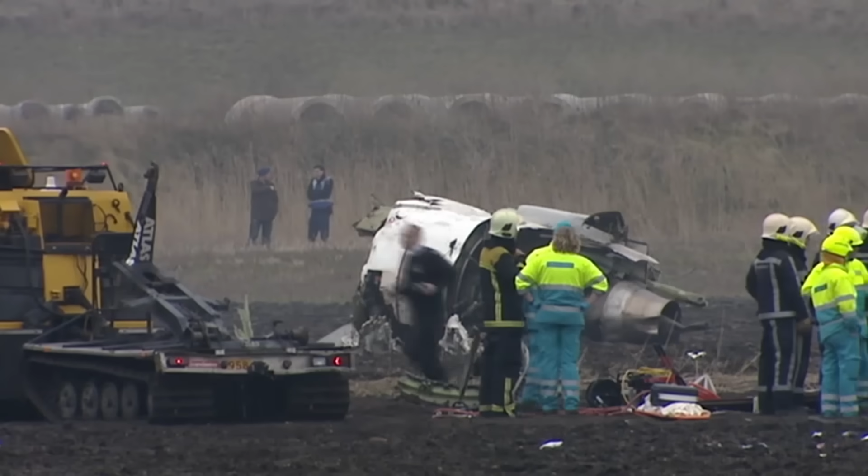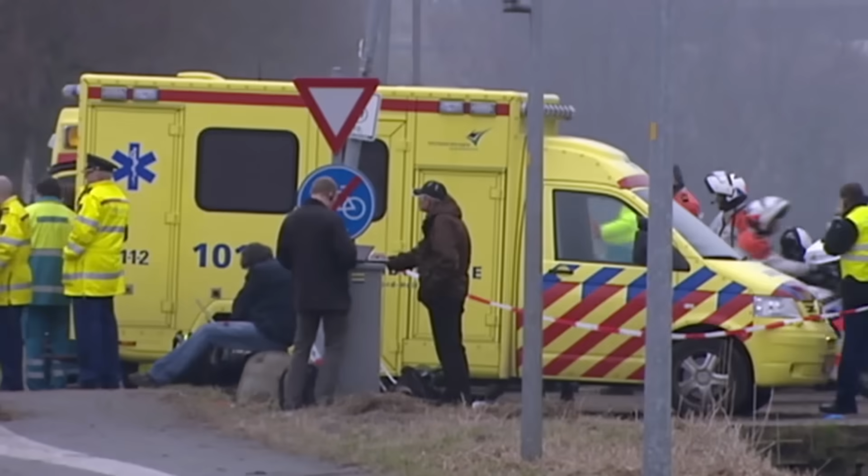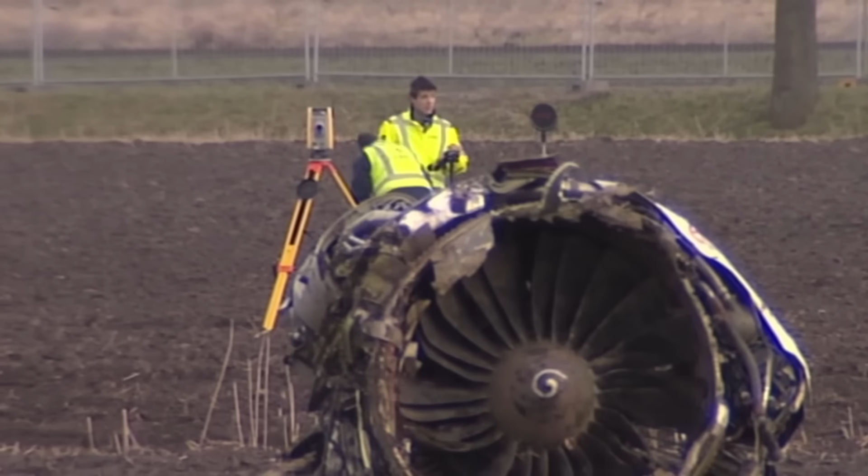It doesn't take long for the Dutch safety board to arrive at the scene. They will be investigating this accident, but they won't be alone. The crash involved an American-made plane, so the US National Transportation Safety Board sends Joe Sedor, one of its most experienced investigators, to Amsterdam. When it's a non-US registered aircraft that crashes overseas, such as this Turkish Airlines, we are the state of manufacture and design of the airframe, and also in this case the engines.

Fuselage in 3 large pieces, engines forward of the main wreck site. Flight 1951 was one of the most advanced aircraft in the skies, the Boeing 737-800 series. It's designed to travel longer routes at higher altitudes. The new generation 737 is still the best airplane Boeing ever built. We developed an airplane that had an improved wing, improved avionics, simpler systems that required less maintenance.

Investigators know this isn't just any plane. The 737 is the world's best-selling commercial jet. Finding out why this one crashed is imperative. There are more than 5,000 of them in the skies. They carry about 1.5 million passengers a day. Investigators must quickly determine if there's a flaw with the plane that could cause another accident.

What they know so far is that Flight 1951 had been traveling from Istanbul, Turkey, to Amsterdam. There were 128 passengers on board the early morning flight, including 4 engineers from Boeing.

Ladies and gentlemen, we're beginning our descent towards Amsterdam Schiphol Airport. Please raise your seat backs to the upright position and stow away your tray tables.

There was no mention on board of any kind of trouble in the cockpit. The crash has killed 9 people, including 3 members of the Boeing team and the pilots in the cockpit. See if you can get me some aerials of the crash site.

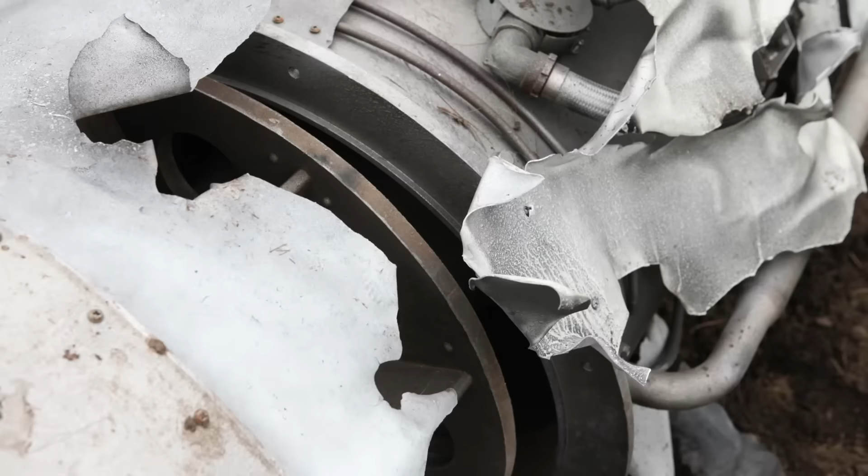The pattern of debris and the passenger reports point investigators to an immediate suspect: the engines. The engines issue was a very big issue in my thought process at the time, initially.

There's no evidence of fire on the fuselage. In many crashes, fuel in the plane's tanks ignites on impact. The lack of fire raises an obvious question: did the engines stop running because Flight 1951 had simply run out of gas? That was one of the first thoughts that I had, was did this airplane have fuel aboard? Because otherwise, how does a 737 literally fall out of the sky on approach to an airport?

But the location and condition of the plane's engines suggest that perhaps they didn't quit in flight. Sure looks like it was running. When we first looked at where the engines ended up, the initial impression was that they probably were producing thrust at impact, given that they were so far forward of the main wreckage. That was just a very general conclusion.

Only the flight data recorder can tell investigators how much power the engines were generating in the seconds before the crash.

Lots of fuel. That rules it out. It doesn't take long to discover that there was plenty of fuel in the plane's tanks. Flight 1951 definitely did not run out of gas.

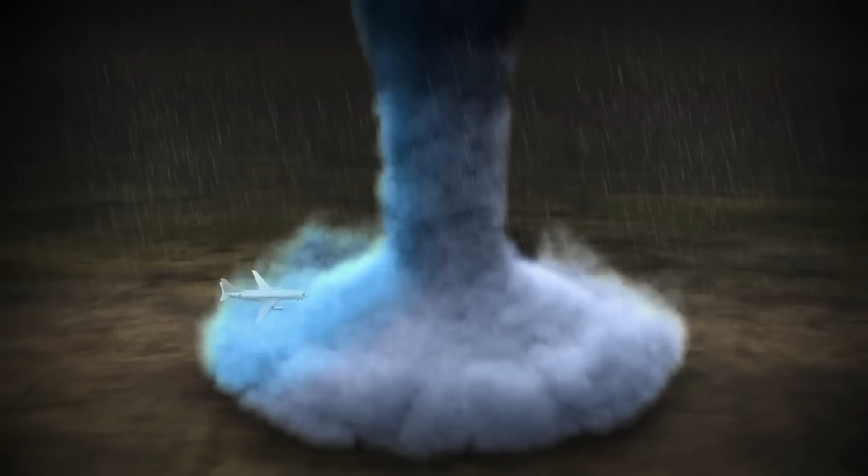Passengers report that in the final seconds before the crash, the plane hit what felt like turbulence. It points investigators to a well-known culprit: a microburst. A microburst is a powerful column of air that shoots out of storm clouds. It can literally slam a low-flying plane to the ground. If an airplane flies into that at approach speeds, you're not going to be flying anymore, you're going to come out of the sky. Certainly it was one of the things that all of us took a look at the beginning. Was there a microburst?

In 1985, a Delta Airlines flight was caught in a microburst while landing at Dallas-Fort Worth Airport. The plane hit the ground short of the runway. 137 people were killed.

Investigators learned that there were heavy clouds above the airport at the time of the accident. A powerful gust of wind may well have accompanied them. The flight data recorder will have recorded wind speeds outside the plane. Investigators will need to analyze the flight data to prove the microburst theory.

In the meantime, the rescue has led to an unusual discovery. There were 3 pilots in the cockpit, which is unusual. This is a 2-crew cockpit. So why was that third pilot there?

Since none of the 3 pilots survived the accident, it's all the more urgent for investigators to retrieve the data from the cockpit voice recorder. It records conversations in the cockpit. They're in luck, because of the way that the aircraft crashed, access to the recorders and the condition of the recorders was excellent. The reason for the third pilot is soon uncovered.

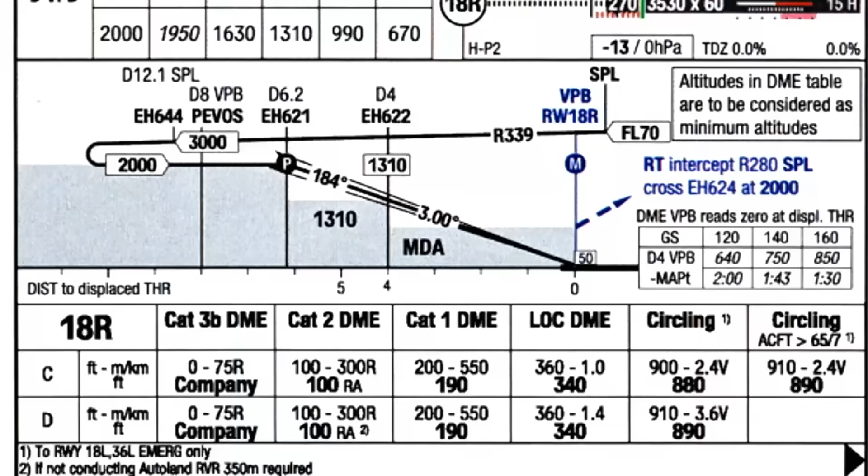For First Officer Murat Sezer, this had been a training flight of sorts. He was new to the airline and was being shown the intricacies of landing at Amsterdam's airport. In the Jeppesen charts, which is what all pilots use to navigate to and from Schiphol, there's 102 pages of information on Schiphol alone, so there are dozens of approaches. Runway 18 right has 3 high-speed exits to the left.

The captain, Hasan Arisan, was doing double duty. He was training his first officer, telling him to make small corrections as they got close to the runway, and was in command of Flight 1951. It's because Captain Arisan was teaching that there was a third pilot in the cockpit.

Olgay Ozgur was a safety pilot. He was there to keep an eye on the flight's progress during this training mission. The purpose of that second set of eyes is to make sure that the captain and the first officer, if they are in a situation where it's a bit of a training portion of the flight, don't miss something.

The voice recorder reveals that the 3 crew members began preparations for landing when still above 8,500 feet.

Amsterdam, Turkish 1951, descending to 7,000, speed 250.

But the voice recorder has picked up an unusual sound, a warning that makes no sense at this stage of the flight. One of the investigators from Boeing was an engineering pilot who came and helped with the CVR, and he's listening to see if there are any unusual sounds that can be heard that would not be normal. Speed okay for ILS 18 right.

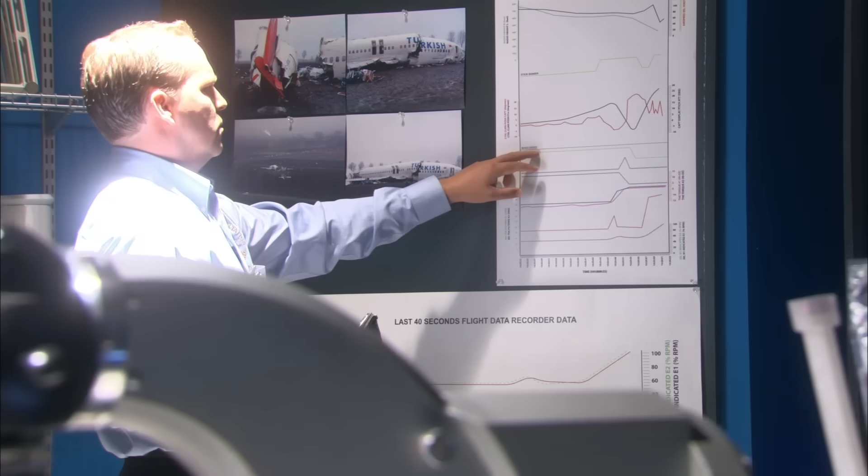But the flight data recorder does provide some valuable insight into the cause of the landing gear warning. One of the instruments that measures altitude had the plane already on the ground. When we looked and saw the radio altimeter data on the recorder, it showed about 2,000 feet, and then immediately it went down to about -8. -8 feet is an indication that the aircraft's on the ground, but of course it's still at 2,000 feet.

The Boeing 737 is equipped with 2 separate altimeters. One measures air pressure to determine the plane's height above sea level. That reading is displayed prominently in the cockpit on both pilots' flight displays. The plane is also equipped with a radio altimeter.

It's made up of 4 antennas. 2 transmit signals to the ground, and 2 others read the signal that bounces back to determine the plane's height. It's precise, very, very precise. Pressure altimeters can sometimes be not as accurate, and radar altimeters are 100% accurate if they're working properly.

One antenna feeds the reading to the first officer's display. The other feeds the captain's instruments. In the case of Flight 1951, the captain's side was wrong most of the flight.

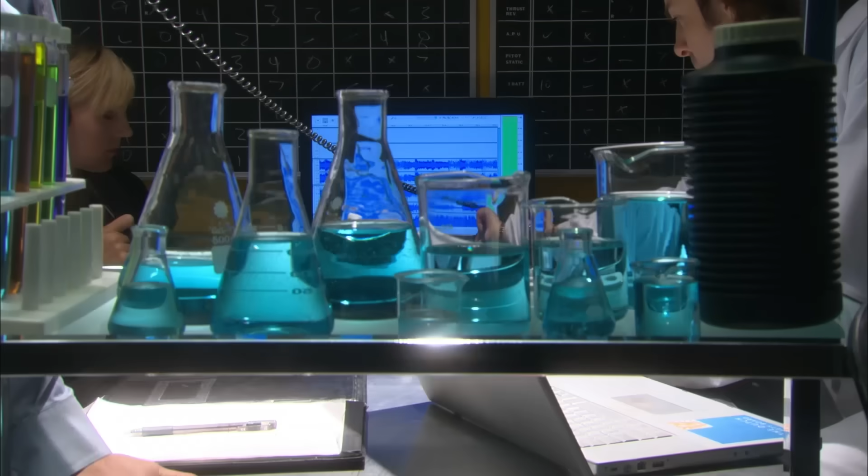Investigators go back over the CVR and make a puzzling discovery. Amsterdam, Turkish 1951, descending to 7,000, speed 250.

Radio altimeter. Captain Arisan seems to have known that the landing gear warning was being caused by a faulty radio altimeter. The airplane thought that it was low to the ground and the gear was not down. The captain recognized that the problem was really in the radio altimeter, showing him that they should be on the ground, and he says, "It's just the radio altimeter."

Throughout much of the approach, the captain's radio altimeter had been displaying a reading of -8 feet, triggering the warning to lower the gear. They treated it like it was a nuisance.

Turkish 1951, descend to 2000. 2000, 1951.

Investigators dig for any other abnormalities. They learn that with Flight 1951 still about 17 kilometers from the airport, controllers directed the pilots to begin their final turn to line up with the runway.

Turkish 1951, left heading 210, cleared approach, 18 right. Left 210, clear ILS, Turkish 1951. 210 set, sir. This turn puts Flight 1951 in line with runway 18 right.

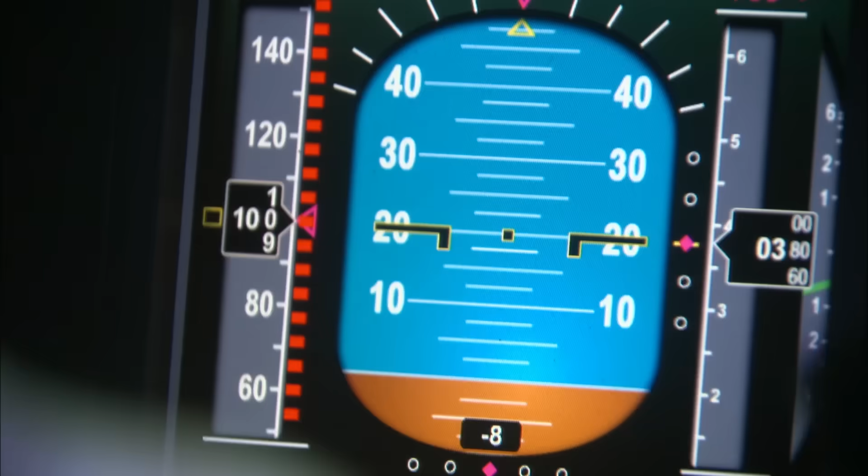Investigators wonder if the crew had been given proper guidance for their approach. They turn to exchanges between the pilots and the controller who guided them in, carefully reviewing every instruction.

Turkish 1951, descend to 4000. Speed okay for ILS 18 right. Turkish 1951, descend to 2000. Turkish 1951, left heading 210, cleared approach 18 right.

By following the controller's instructions, the crew made their final turn much too close to the runway. To intercept properly, they should be here. International guidelines call for approaching planes to intercept the signal that guides them to the runway from below, so pilots don't have to make any drastic last-minute course corrections to get to it.

To intercept here, they had to descend. But Flight 1951 was given instructions that brought it to the threshold of the glide slope while still way above it. It's a common practice at Schiphol because it gets planes to the runway faster. Because they were so close, they had to capture the glide slope from above.

Although it is an unusual situation, it is one that can be handled by a flight crew if it is managed properly. Approaching a glide slope from above is more difficult, mostly because the crew has to suddenly slow the plane and descend rapidly to intercept the signal.

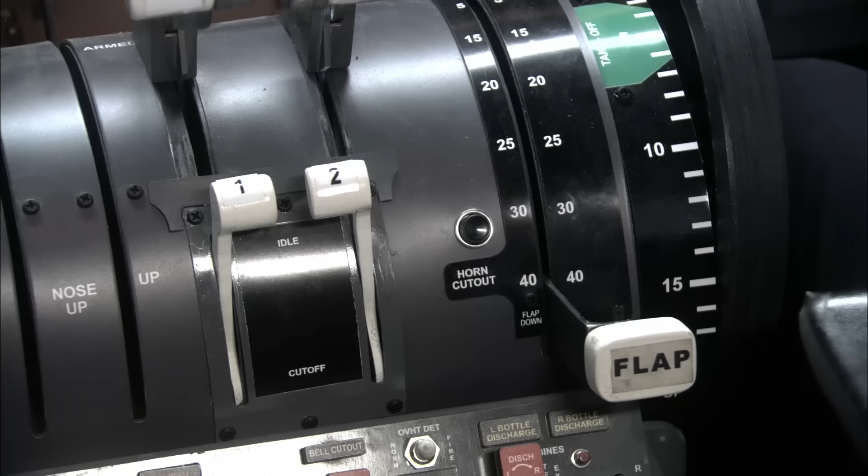Most airlines have regulations that call for a flight to be stabilized, to have all checklists completed by the time the plane hits 1,000 feet. In instrument conditions, you're required at 1,000 feet to have basically everything done. The airplane is configured, you have slowed, you have run your before landing check, and you have received your landing clearance. And from 1,000 feet on in, you just monitor the instruments, and we're looking for the runway.

Please warn the cabin crew. Cabin crew. In fact, this crew was still running their checklist up to the moment the crisis hit, 460 feet above the ground.

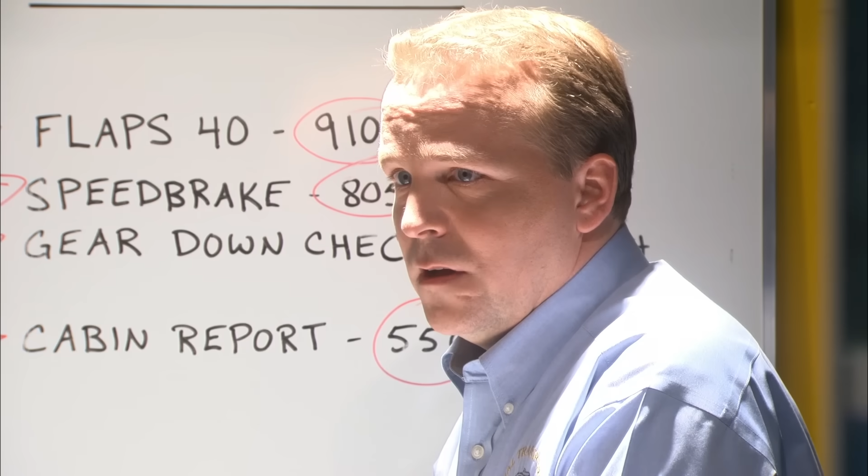This approach was not stabilized. Because the aircraft was unstable, the flight crew was in a very high workload environment in the last 1,000 feet of flight. The radio altimeter was malfunctioning. The aircraft was giving off warnings. The crew was assigned a challenging approach, and they were executing a checklist late.

But none of this explains why Flight 1951 crashed. In these type of accidents, you can never get inside the head of the pilots. And that's a very frustrating type of accident.

But the flight data recorder does provide another intriguing clue. Moments before Flight 1951 hit the ground, the plane's engines were at idle, hardly providing any power.

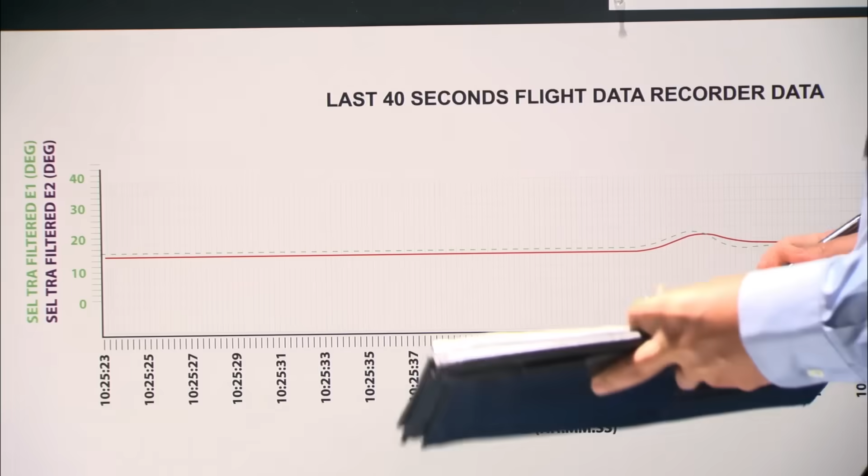Perhaps this accident is a repeat of the Heathrow incident. The engines, it was interesting to note, were at idle approximately the last 2 minutes of the flight, until the very end when the thrust was increased again. That was a big red flag right there. The question is why was that the case?

But then they spot something that's very different from the accident at Heathrow. Retard flare mode. For some reason, while still more than 1,000 feet above the ground, the plane's computer began preparing to touch down.

In retard flare mode, engine power is reduced to idle by the flight computer, and the plane's nose automatically pitches up to the flare position. Planes should only be in this configuration just before they touch the ground. The autopilot raises the nose to break the descent. The auto throttle brings the power back to flight idle, and you touch down with the power either all the way in idle or just about to be in idle.

But Flight 1951 went into a slow, nose-up position well before touchdown, causing the plane to fly slower and slower throughout its descent. So why was Flight 1951 in landing mode? And why hadn't any of the 3 crew members noticed how slowly they were flying?

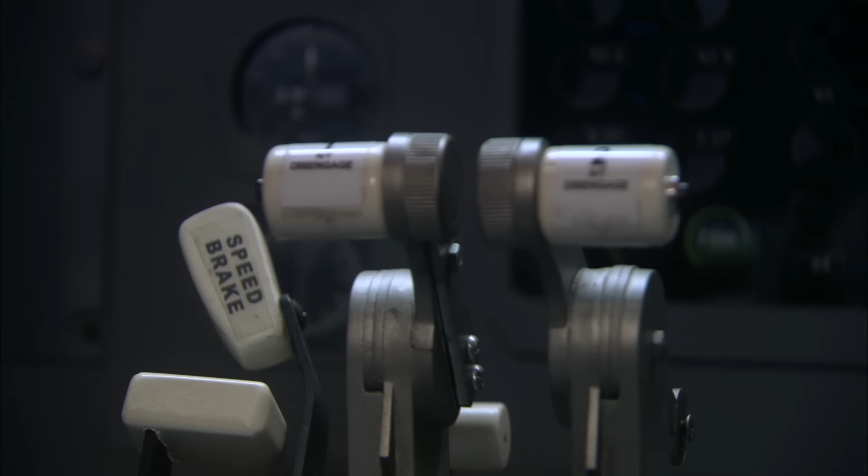We had to say, how did the autopilot use that data? More importantly, how did the auto throttle use that data? The computer that flies the plane consists of two main systems, the autopilot and the auto throttle. The auto throttle determines how much power to ask the engines for, while the autopilot controls the plane's altitude and direction.

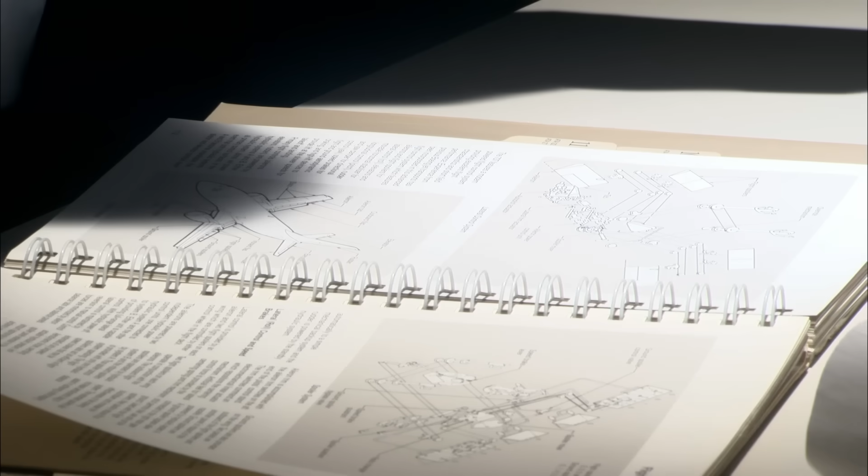The two systems work independently of each other, and only one of the radio altimeters provides information to the auto throttle. In this case, I had to learn everything there was about radio altimeters and auto throttle systems, which I didn't know before. The pieces of the puzzle begin coming together when they find the connection between the faulty radio altimeter and engine power. The radio altimeter provides information to the auto throttle from the captain's side.

The only altimeter feeding information to the auto throttle was the captain's, and it was wrong. It showed -8 feet throughout most of Flight 1951's approach.

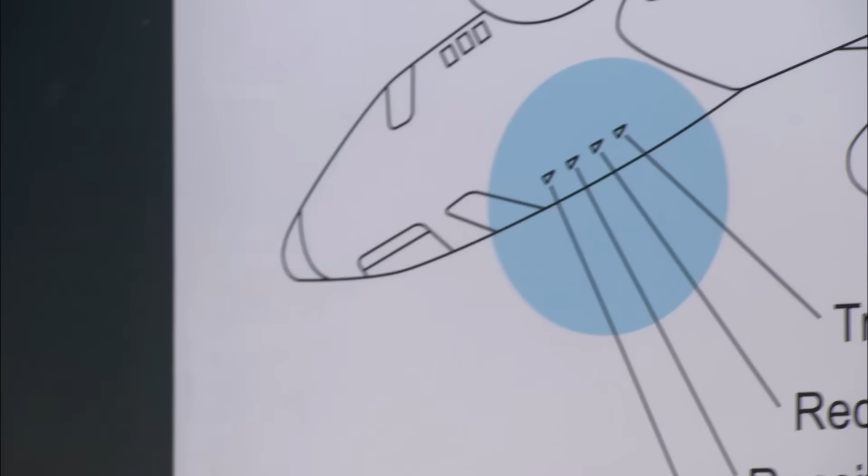It's beginning to look like the faulty radio altimeter triggered the events that led to the crash. Investigators need to know what went wrong with it. On a 737, the transmitting and receiving antennas for both radio altimeters are lined up underneath the cockpit. 3 of the antennas were all but destroyed in the crash. They can't be tested. But one antenna from the captain's side is undamaged.

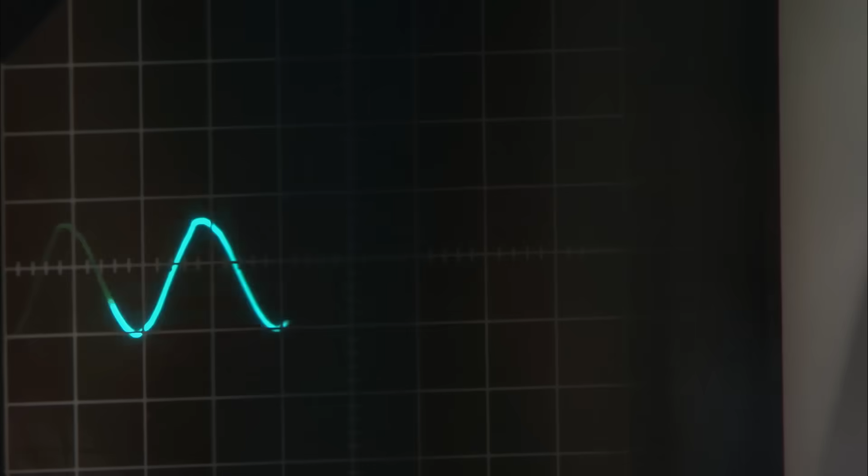Investigators consider 2 possibilities: a failure of one of the components, or some sort of interference that caused the faulty reading. The only component that survived the crash checks out. The computers that control the system also work. But investigators do make a curious discovery about them.

They aren't the same ones that were installed on the plane when it was delivered to Turkish Airlines 7 years ago. This find changes the focus of the investigation. The maintenance aspect of this accident aircraft was one that we looked at as deeply as we could.

When the plane's maintenance log is studied, investigators find that the radio altimeter on this plane had a problematic history. We got additional data from Turkish Airlines, and that data showed that on this one aircraft, of the past, I believe, over 1,000 flights, there was about 150 flights that had faulty radio altimeter systems.

The documents show that a little more than a year before the crash, both computers were replaced because of complaints they were causing faulty readings. One of the incidents involved a radio altimeter reading of -8 feet. So that was telling us that there was an issue that had been there.

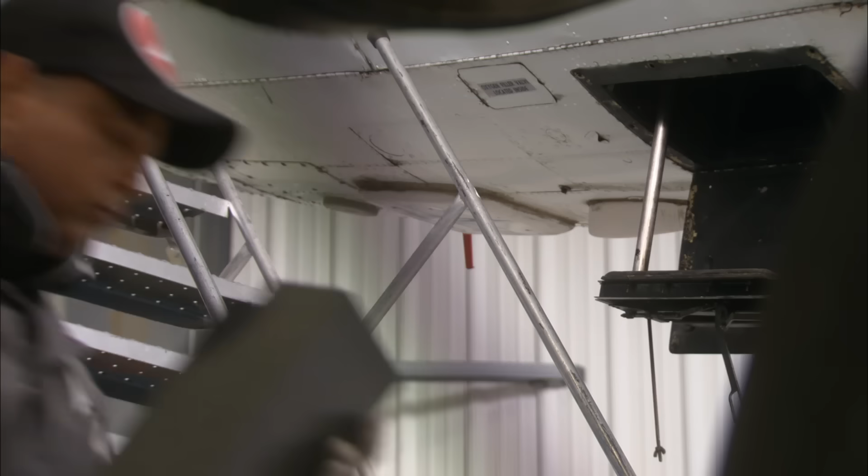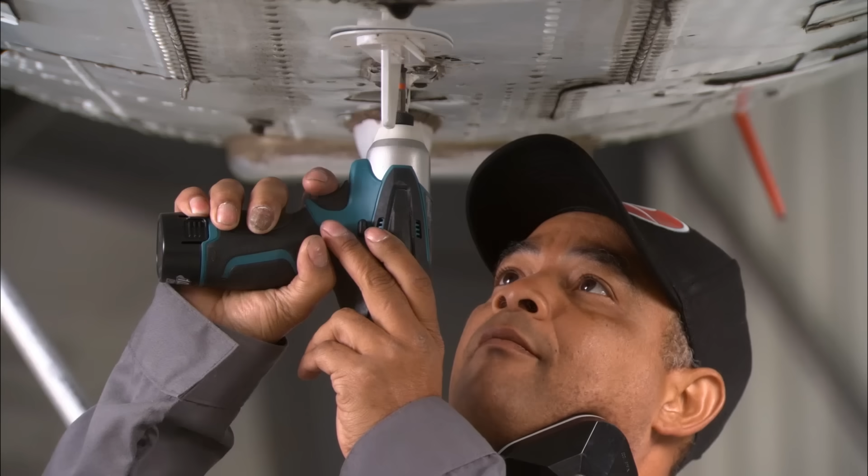The issue did not just occur on this flight. The faulty readings persisted. Mechanics repeatedly swapped the computers and replaced the antennas to try to solve the problem. It's determined that Turkish Airlines tried several ways to fix the altimeter, but they couldn't find a repair that worked. At the time of the accident, Turkish Airlines had a fleet of 52 Boeing 737-800 series airplanes.

It's on page 93. When we reviewed the maintenance data, we found that radio altimeter problems had been written up several times on both the accident airplane and the fleet. Investigators discovered that in the year before the crash, Turkish Airlines dealt with 235 system faults with the radio altimeters on their 737s. Fixes ranged from replacing and exchanging antennas, cleaning of the systems, exchanging and replacing the computers, and installing gaskets to shield the system from possible water damage.

It's not like they weren't doing anything about it. The Turkish Airlines maintenance personnel knew that the radio altimeter problem was one of their highest issues with regard to maintenance. 16 of those altimeter repairs were made to the plane that crashed in February 2009.

If the problem was so widespread, investigators wonder why it hadn't caused serious problems before this accident. They don't have to dig too far back to find out that in fact it had, on this very same plane. On 2 recent flights, they had the exact same problem. Twice in the 48 hours leading up to the accident, the radio altimeter showed a negative reading, putting the plane into retard flare mode. Both times the crew noticed the problem, disengaged the auto throttles, and brought the plane in for a safe landing.

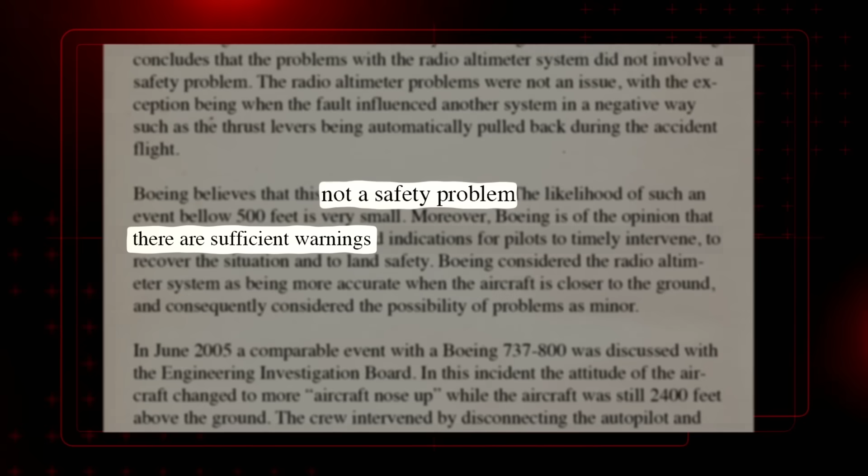Boeing also tried but couldn't find the cause of the failures. They concluded that the radio altimeter problem was not a threat to safety because the 737 gives off enough warnings so that crews can intervene and land safely. In fact, in every instance where the radio altimeter failed, crews were able to recover.

Turkish Airlines Flight 1951 seems to be the one exception. Investigators still don't know why. It really got us wondering what happened. And that's when we started to look really closely at the actions of the flight crews while it was on that final approach in less than 1,000 feet.

Finally, as investigators again revisit the last minutes of Flight 1951, the circumstances of the tragedy become clear. They see a remarkable sequence of events that transpire to bring down this plane. So, what was happening when the plane went into retard flare mode?

They discover that the plane went into landing mode and pulled back power at the worst possible moment, exactly as the crew was descending to meet the glide slope. It masked what was actually happening.

As the crew configured their plane to drop down to meet the glide slope, they expected the plane to slow down as part of that maneuver. But the plane was actually slowing down because the computer was in landing mode. That's why none of the 3 pilots said anything about the throttles moving to idle.

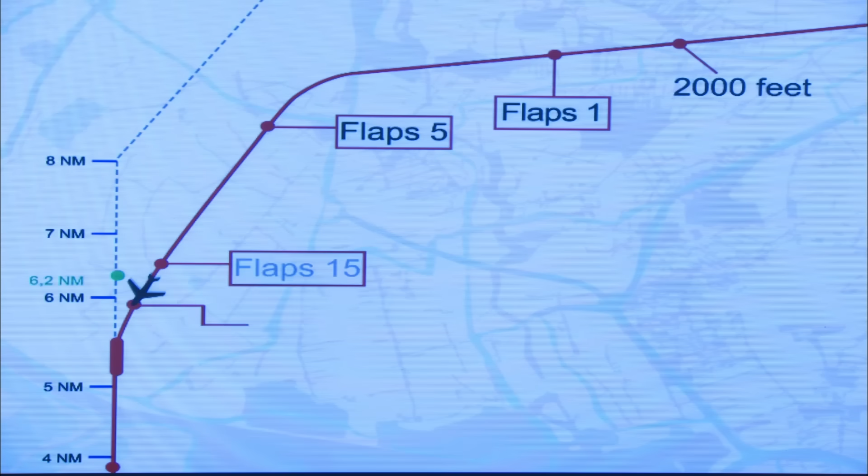Turn left heading 210 degrees, maintaining 2,000 feet, brings the flight in right here, 5.5 miles out. They now have to intercept the glide slope from above.

At 2,000 feet, with the glide slope below them, the pilots have to reduce their speed while descending steeply. Speed 140. They believe the throttles are moving back for the descent to the glide slope. In fact, the auto throttle is slowing the plane down because it's gone into landing mode. It will continue to slow the plane until it stalls.

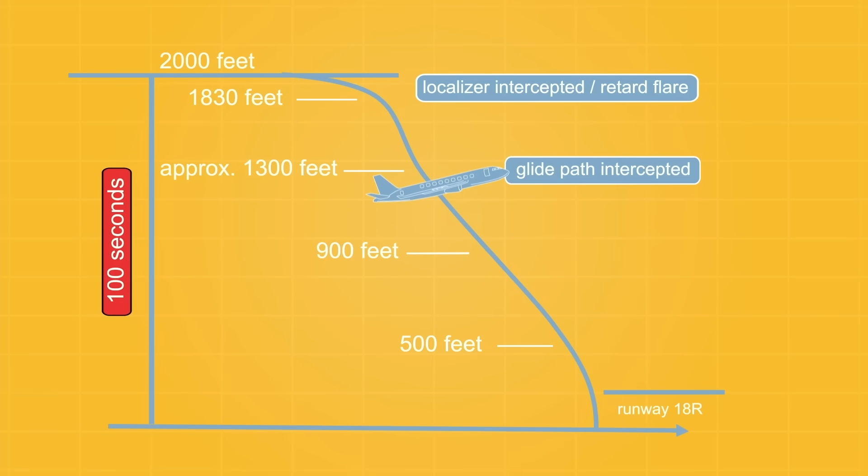What we found is that when the flight crew was doing their before landing checklist, each one of them was doing something while they should have been monitoring their airspeed. For the next 100 seconds, no one notices what's happening until it's too late.

Established, altitude set, 1,000, check. Flaps 40, speed set. The experienced pilot recognized that the first officer was probably a little bit behind on the approach, so he calls for flaps 40 and moves the lever, informing the first officer that he has done so. He's trying to help the first officer catch up to the position of the aircraft.

Speed brake, speed brake armed, green light, one thing at a time. Landing gear. The plane is now 700 feet from the ground. Gear down, 3 green. Flaps. Flaps 40, green light.

In their haste to complete their checklist, none of the 3 crew members noticed the warnings that their speed is dropping dangerously. First, a red bar appeared on their flight display. Then, when the airspeed continued to drop, a flashing box appeared around their actual airspeed to draw the pilot's attention to it. At this point, no one sees either.

Cabin report confirmed. The aircraft is now 600 feet from landing. When things start changing colors, it's a warning to you, it's a caution to you that you're approaching the limits of the aircraft. Missed approach.

Altitude set, 500. So all of these indications the crew has in front of them saying that the aircraft is slowing down. During that time, they were still completing their checklist. Of course, the aircraft is getting closer to the ground. In fact, it's less than 500 feet from touchdown.

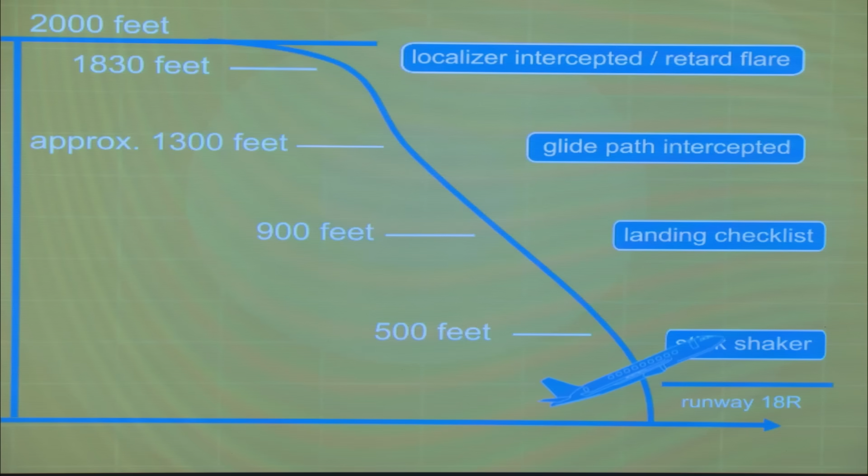They all knew about the altimeter problem, but knowing didn't help.

Boeing also didn't foresee the potentially deadly effect of a faulty altimeter. But on February the 25th, 2009, it triggered an unusual sequence of events that brought down a jetliner and killed 9 people.

The official report into the accident blames it on a convergence of circumstances. There is never, ever just one cause to an airline accident. It simply doesn't exist. Maybe someday God will swat one out of the sky, but until then, there's never one cause. The Dutch report also points out that Boeing could have realized the problem with the radio altimeter system could have had an impact on safety.

Given that no one foresaw how that failure might cause a crash, the Turkish Airlines accident raises a big question. Are airplanes becoming too complex?

Investigators have determined that Turkish Airlines Flight 1951 crashed mainly because the pilots didn't recognize the consequences of the warnings they were getting.

Turkish 1951, descend to 4,000.

This is not the first plane to crash because the crew didn't understand what their plane was telling them. Our problem is not the automation. Our problem is the depth of the training and the ability of the human beings to recover from mistakes made in interfacing with the automation.

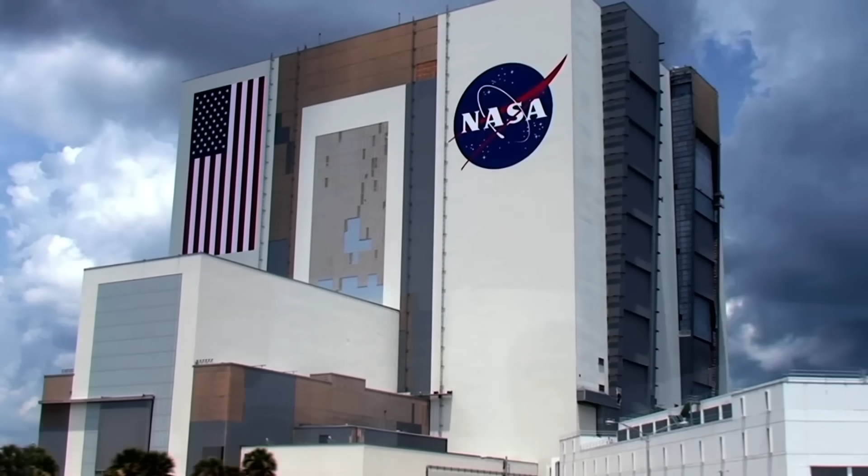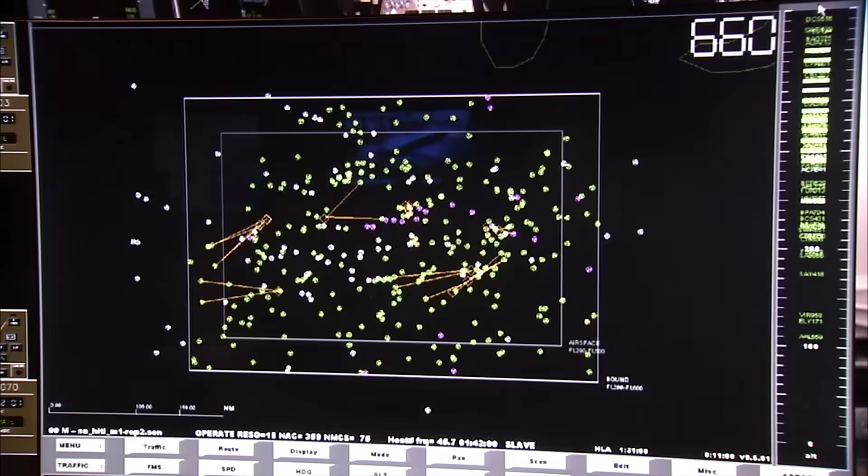NASA is working on something called the Integrated Intelligent Flight Deck. It's a project aimed at helping humans better use the technology that surrounds them in the cockpit. They're looking at automated flight manual systems, voice recognition systems. They've developed new kinds of microphones that are bone-conducting chips. They're developing new displays for understanding the ground environment, for being able to detect where other aircraft are in the environment. What some researchers are finding is that the best technology shouldn't replace pilots, but work with them.

Really integrating people with technology more effectively has to do with designing the displays so that you can really understand what it's doing, and you can make it simpler to understand how to make it do what it is you want it to do. You shouldn't have to push 16 buttons through 8 levels of menus to figure out what's going on with the system. It should be integrated and presented effectively. It should be as easy to communicate with as the person next to you.

Boeing and Airbus, the 2 largest manufacturers of passenger planes, take very different approaches to the relationship between humans and technology. Airbus gives the flight computer much of the decision-making power in the cockpit. In their view, this is a way to prevent a lot of human errors by making sure the airplane doesn't do something that's going to cause a crash, even if the humans wanted to. But Boeing has a different view. Its philosophy is to provide information to pilots and have them make decisions. Having more information is better for the pilot, having the pilot in the loop, in the equation, so to speak. I kind of like that. Airbus will argue vociferously and in continuous fashion that that view is archaic and incorrect. I think the jury is still out.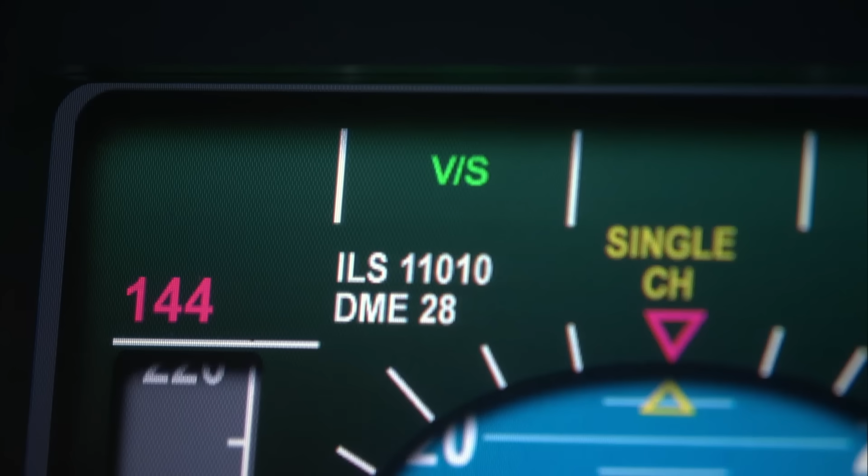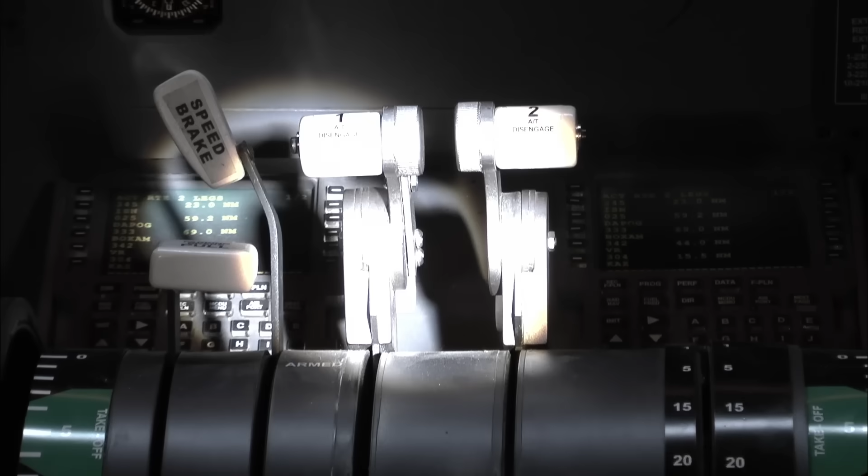The final report into the Turkish Airlines tragedy blames the crash of Flight 1951 partly on a failure of technology. The erroneous radio altimeter data caused the autothrottle to go to an improper mode, that is, of course, not a good situation. The cause of the radio altimeter failure was never uncovered. The Dutch investigation asks Boeing to improve the reliability of the system. We learned a lot about the radio altimeter system and how it affects the autothrottle system. Boeing is currently working on system improvements to prevent this type of autothrottle event from occurring again.

But the report also faults the crew for not noticing that their airspeed was dropping dangerously low, in spite of the fact that there were 3 pilots on board. Forget that you got an autothrottle. You look at the airspeed, and you look at the altitude. You look out the damn window if you want to, but airspeed is a crucial component of staying alive in an airplane. And you always need to know what your airspeed is.

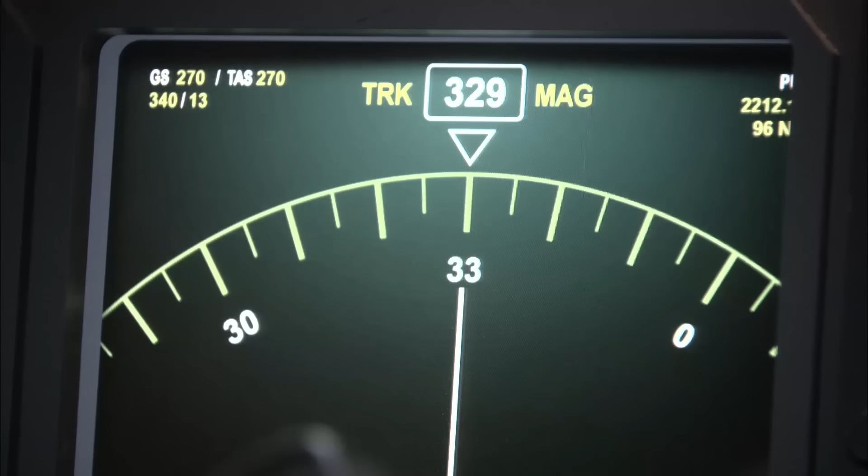But to Mica Endsley, the crew's failure to monitor instruments is entirely understandable and may be more the fault of the instruments than the crew. It's actually very difficult for people to be monitors of automation. One of the things that people don't do a good job of actually is monitoring. We're very good on-the-spot decision makers. We're very good at coming up with creative solutions to problems, but repetitive monitoring is the kind of thing that people aren't very good at all.

So what we have to do is design automation to work with people in a way that keeps them more actively, cognitively involved and in the loop, and not just monitoring a piece of automation to say, is it doing what it's supposed to be doing? Who's the ultimate computer? The pilot, the individual who should be able to say, I don't know what this thing is doing to me, but I'm punching it off and flying the airplane. Fly the jet. Probably the smartest thing we ever learned to say in our training in the airlines: fly the jet. Do that first or nothing else counts. That's what they forgot to do.